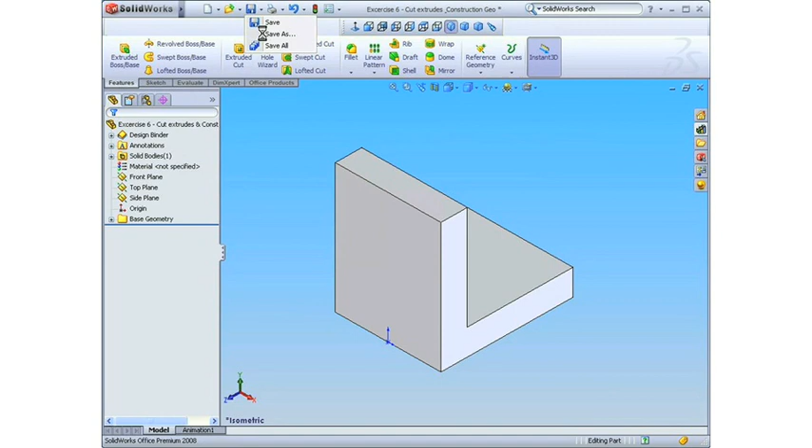This is exercise 6 from the Cut Extrudes and Construction Geometry lesson. We're going to again begin exercise 6 with some base geometry. So let's select Save As, navigate to our location, and save our file as exercise 6.

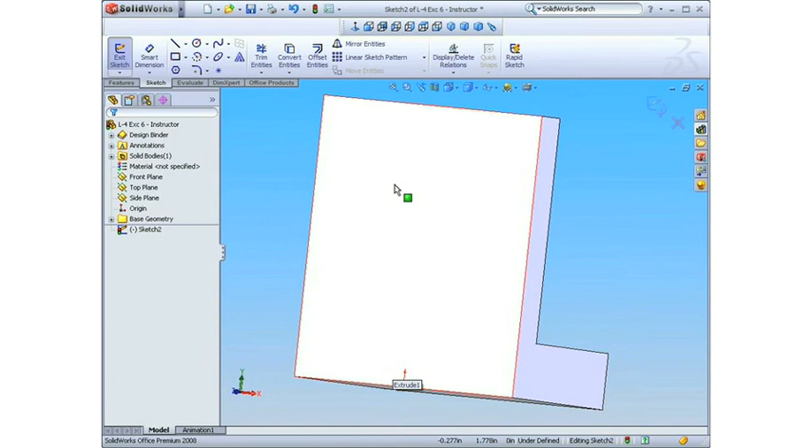Now, before we do our cut extrude in this example, we need to first add a boss to the front face of our part file. So let's select that front face and select Sketch and select Normal To. Now we want that boss centered on this back face, not on the front face, but we're drawing it on the front face.

So what I'm going to do is change my display type to show hidden lines. Now we can see where the dotted line for that back face is. So we'll start by selecting our center line and sketching kitty corner through that back face. Next, I can add a circle starting on the midpoint.

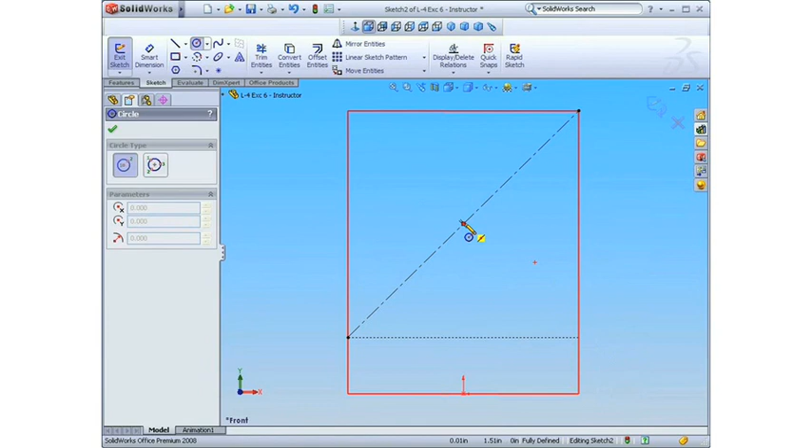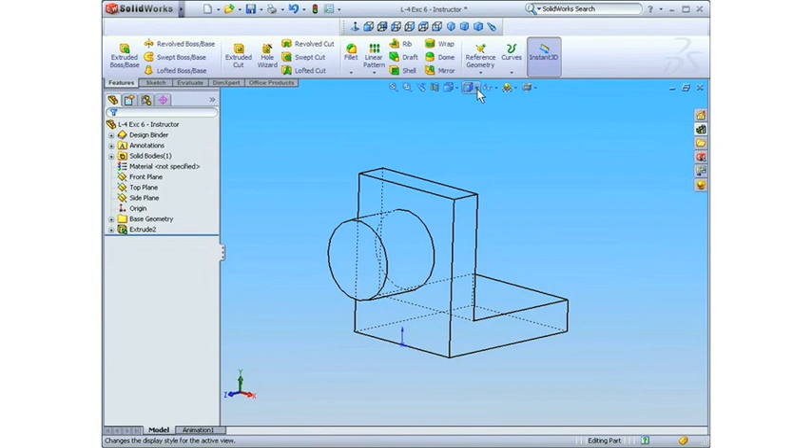We'll draw my circle and then add a smart dimension to define the diameter of that circle at 1 1/4 inches. We can now conclude this with a feature. That's a boss extrude, and it's going to protrude 1 inch, and we can select OK. Switch ourselves back to shaded with HLR edges.

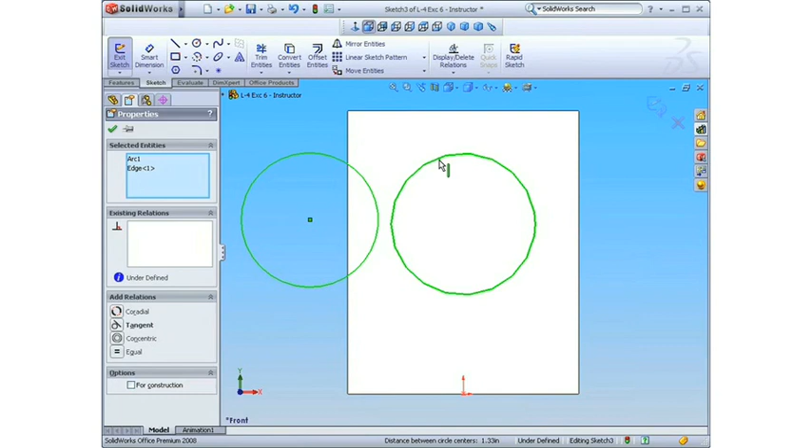And now that our shape's complete, we can add the cut extrude to the front face. So select that face, we'll select Sketch, select Normal To, select the circle command. We can draw a circle just off to the side here. And then we'll hold Control down and select the two circles, again adding a concentric relationship. Lastly, let's use a smart dimension to define the size of that circle to 3/4 of an inch.

And we'll rotate around before we add the feature. That's a cut extrude, again going through all. Again, we can see that through all goes through all of the geometry. It would cut anything it intersected with until it got to the end of our geometry.

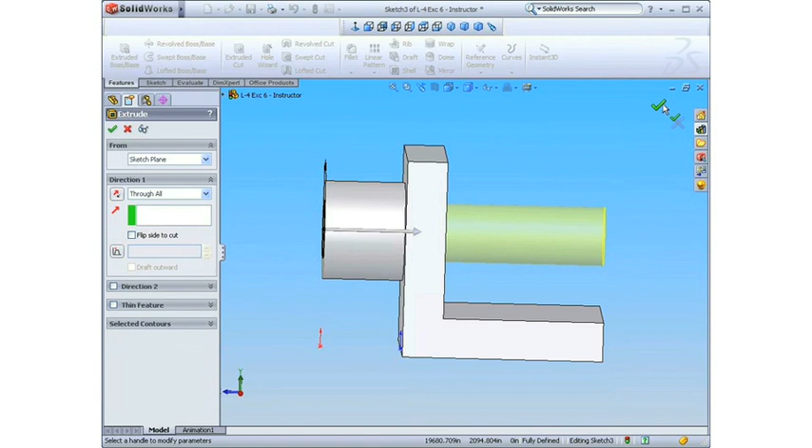So we can accept. Let's do a quick double check to see if our design intent was maintained by modifying the size of our part here. Indeed, that circle stays centered on that face. I'm just going to use Control Z to undo the last few changes that we made.

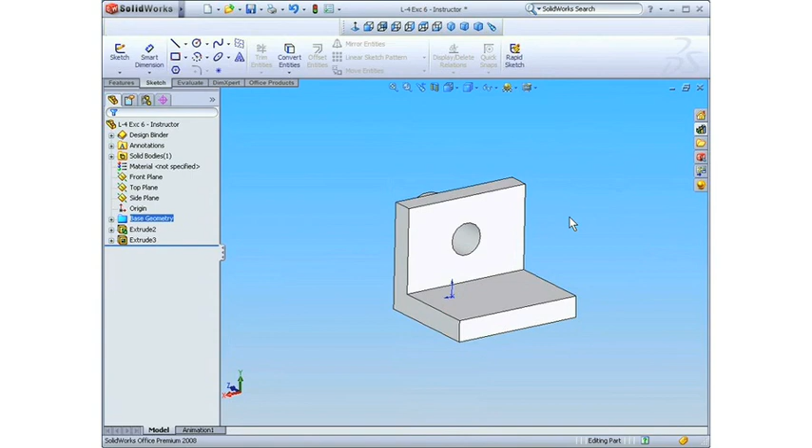Save that. And that concludes exercise 6 as well as lesson 4. It's time to move on to our next lesson.